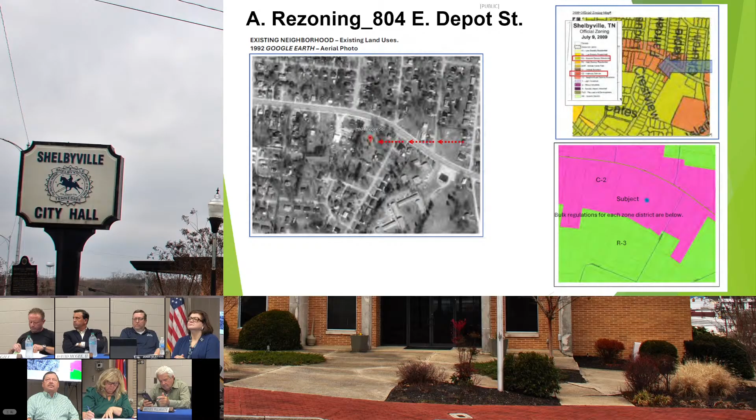It met all the, it's very consistent with the map, with our future land use plan and comprehensive plan. As you can see in this old photograph, it's always been a vacant parcel. Here's the 2009 edition that shows that same split zoning.

Surrounding neighborhood, this property here is also split zone, but this is a commercial land use. You've got some residential around there, but the commercial fits neatly within there. It cleans up that split zoning. And the owner has already started to provide screening around it by adding a tall fence around the residential area.

But in essence, it meets all of our, I guess it's a good project to clean up, I should say. Okay. Comments, questions?

Motion. I'll make a motion to send a favorable recommendation to city council. That's a good cleanup that's needed.

Motion made, seconded, roll call. Commissioner Gill, yes. Commissioner Gonzalez, yes. Chairman Landers, yes. Commissioner McGee, yes. Commissioner Moore, yes. Councilmember Blevins, yes. Commissioner Wilhoit.

All right, B, rezoning 103 Moreland Street, tax map 690, group D, parcel 4.

John K. Asher Branner, owner, C&L Properties and Investments, representing or requesting a favorable recommendation of the Planning Commission to the City Council for the rezoning of approximately 0.92 acres of the parcel currently zoned R2, medium density, low density residential, to R4, high density residential, for the purpose of developing a high density residential dwelling land use located in the Robinson Farm subdivision. Parcel is currently a single family land use and classified in the future land use map as North Main Street corridor character area.

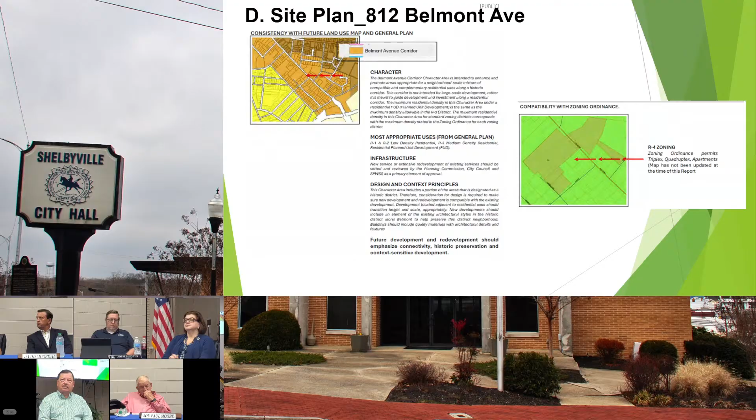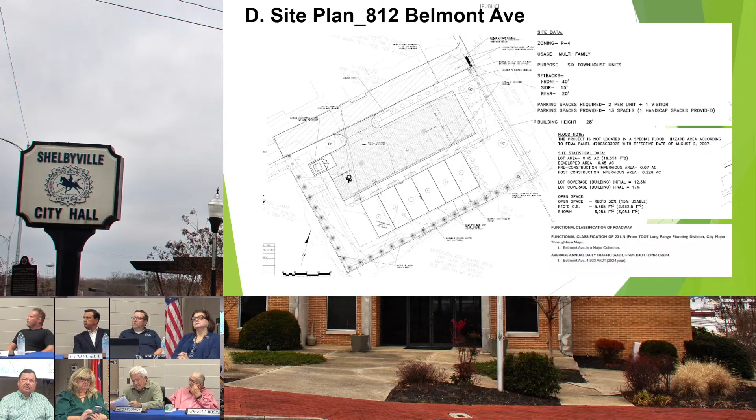Compatibility, this one's not showing it, but this is R4. You have the R4, the 1985 higher density residential here, and then you have the one across the street, and then just located to the southwest there. As far as all the standards, you can see this is the site, what they're providing, and they're either meeting or exceeding the requirements for multifamily use. Let's see, so you have 6 units along here. Here's Belmont, and then they're utilizing access in here. There were requirements for extending infrastructure, which they have done. They've recorded easements for that, as you can see in this photograph. So they've got easements running southwest.

This was their open space plan, and for my calculation, I just measured the area and came up with it, but this was just a conservative 21%. You can see that they've got all their landscaping surrounding the building and the parking lot, which is consistent with the design standard. And in the materials, textures, and colors, it'll be this section of multi-residential development. This is our updated standards from earlier this year. So you can see that for multifamily residential, consideration should be to maybe change the overall look to make it more distinctive. But I will say that our design standards are forcing a lot better quality multifamily. And so each one is kind of a test case, a guinea pig, so to speak.

Tom, I have a question. As you mentioned, in December I think we went over this. So when this came back to the agenda, I looked back at the minutes, and there was a comment in there about the 3. Yeah, about the 3, and it says that the lot will only support 3 units without improvements and 4 units with improvements to the sewer. I think that's what we were talking about. Yes. Can you address that comment on what's changed between then and now?

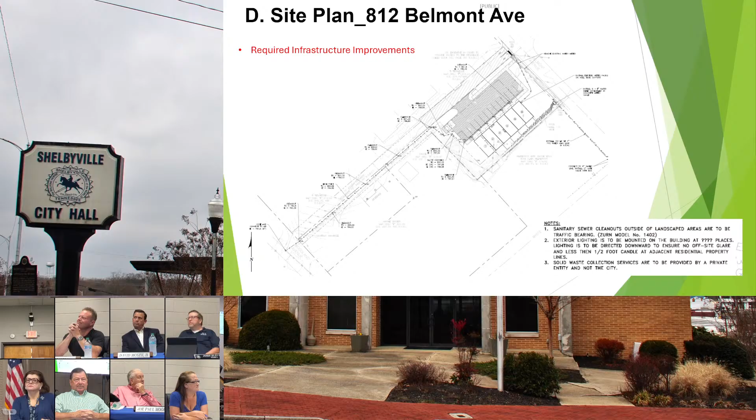There was no way that I would bring anything here and lie to anybody. It's not ethical. On the 6 units, we went from duplexes to 2-story instead of single-story. That allowed us to put additional units on there and meet the guidelines. So that's the reason we went from 4 to 6, because we went to 2-story units. The issue with the sewer was John Freeman said, I can allow you to put 4 units on there with the existing sewer.

That wouldn't have worked even if we would have left it at 4 units because it was a 3-inch sewer line. Once we got over there, tore the building down, got to looking at how things run and routed, it just wouldn't work. It wouldn't even work the way it was run. It came down the Marsh property and went down White Street. There was some creative plumbing going on there. At the least. And that's what we understood from the get-go. And that makes more sense.

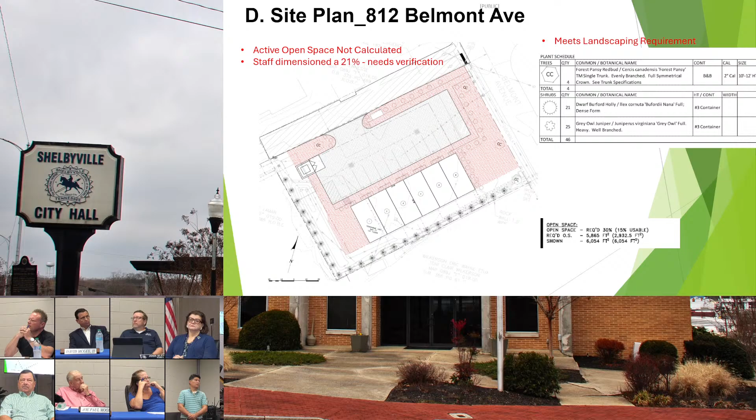Were there any more questions? The road there, the existing gravel driveway that went back, is that? That deed goes back to the early 1900s, and I've got a copy of it out in the truck. I guess that'll be the access, and then it'll pull into the parking lot there, so there will be no direct access off Belmont.

Yeah, and it would be difficult to do that because that's a major collector, I believe. Yeah. Along there, that's TDOT's right of way. You've got an existing one. They would most likely require that; that was one of the staff comments as well, working with them. Yeah. Getting that access set.

Yes. The part that's hashed out, you said gravel, we're doing concrete. Yeah, that was one of the requirements from TDOT Tennessee. Okay. They wanted that 20 by 175 concrete area. So it'll be concrete then leading to a paved parking area, or other concrete? Yes. Asphalt. Okay.

I think we took a large eyesore in the community and we'll end up with a really good product there that's going to look nice, nicer than most anything around it. Not that this affects this property, but in our PUD, which we would like to bring over to these higher densities as well, you can use a stormwater facility if it's a bioretention area. And then that can be part of the active open space.

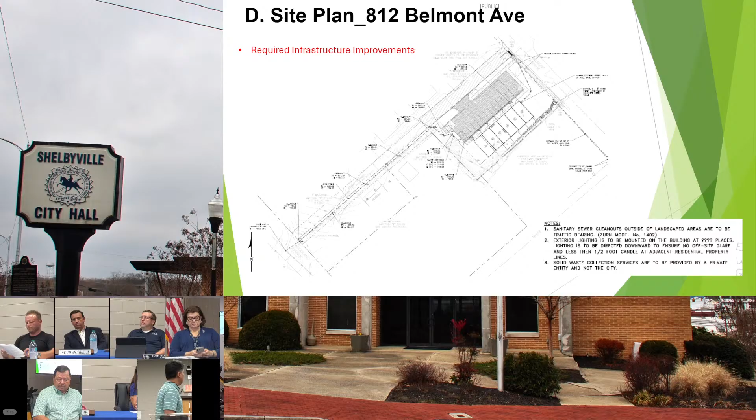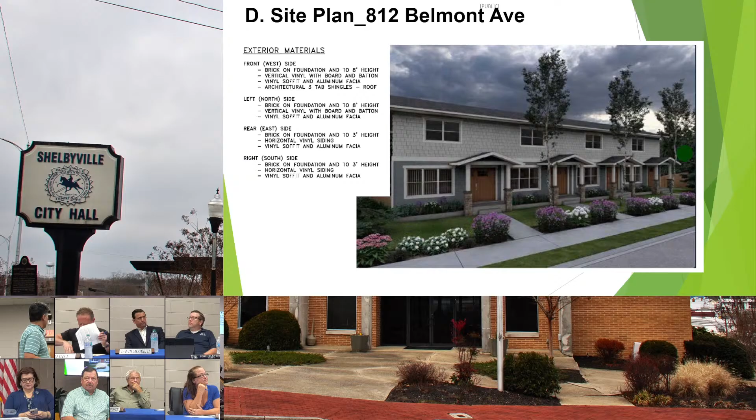Is this what they're planning? Is this the elevation that they're planning? This is what they're planning, yes, this one's accurate to their drawings. Go over the conditions, if there are any. Back up. The three conditions in the chart. Yeah. That's it.

Then, as far as the architectural part of it, you may want to add distinction to the unit facade, but the reason why I put it as desired is because I recognize that our design standards, I think of it as a step process and step improvements. So as we see each type of development come about, we might want to improve it more. Okay, yeah, I think the distinction would...

All right. I'll entertain a motion. Make a motion. Well, I was about to make a recommendation, but I guess I'll make a motion to pass the site plan. Motion made to approve. Do I have a second? Yes. I do have a second. Roll call.

Chairman Landers, yes. Commissioner McGee, no. Commissioner Moore, yes. Councilmember Blevins, no. Commissioner Wilhoit, yes. Commissioner Gill, yes. Commissioner Gonzalez, yes. You have 5 yeses and 2 noes, so it passes. All right.

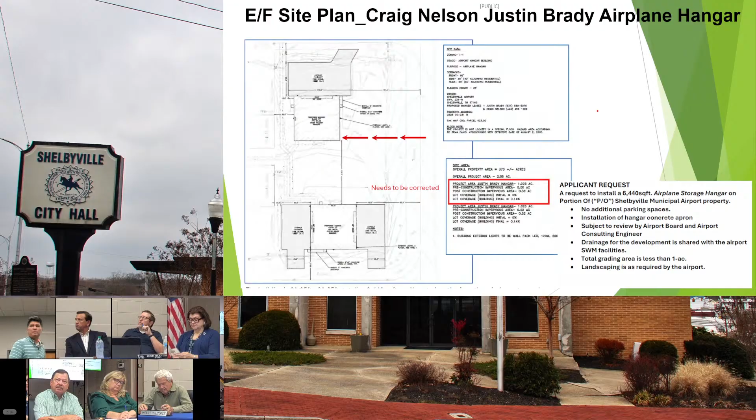This is the typical, it's just a metal building. I looked it up to see what that might actually look like. But in essence, both of them are giant parking lots for airplanes. All right, any other questions?

Make a motion to approve? I'll second. Motion made, seconded, roll call. Commissioner Wilhoit, yes. Commissioner Deal, yes. Commissioner Gonzalez, yes. Chairman Landers, yes. Commissioner McGee, yes. Commissioner Moore, yes. Councilmember Blevins, yes. Thank you.

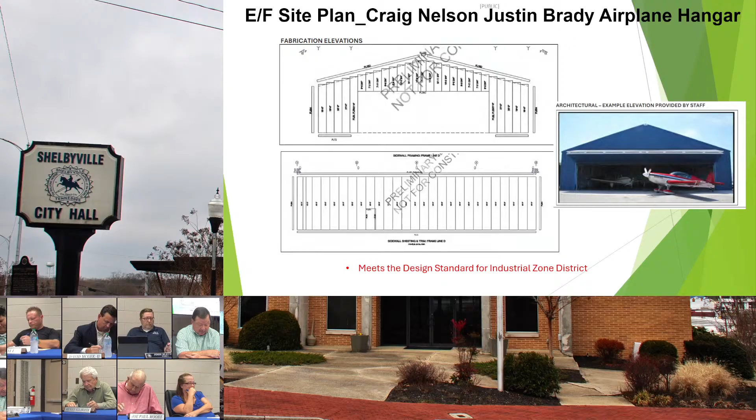Approved. All right, site plan for an aircraft storage hangar, Shelbyville Municipal Airport, tax map 50, parcel 23. St. John Engineering representing the leasee, Justin Brady, Paul Perry, owner representative, director of the Shelbyville Municipal Airport, requesting approval of the planning commission for a new 6,440 square foot aircraft storage hangar on a portion of an approximately 374 acre parcel, zoned I-1 light industrial and located on Shelbyville Municipal Airport. The airport is classified on the future land use map as North Gateway Corridor character area.

You got it on there twice. I didn't know. Oh, two of them. Yes, because they were separate applications, but they are the same thing. Same building there. Yeah, yes. Unless you really want me to talk some more, I can go through it. That's the same deal. Make a motion to approve?

I'll second. Motion made, seconded, roll call. Councilmember Blevins, yes. Commissioner Wilhoit, yes. Commissioner Deal, yes. Commissioner Gonzalez, yes. Chairman Landers, yes. Commissioner McGee, yes.

Commissioner Moore, yes. All right, site plan amendment for the Cooper Christian Academy, 1012 Madison Street, tax map 89F, Group G, parcel 17. Cooper Christian Academy owner and St. John Engineering representing, requesting approval from the planning commission amending the previously approved site plan by phasing development into two phases. Parcel is 11.42 acres, currently zoned C2 general business, part of the Chancellor Square subdivision, and classified in the future land use map as a mixed density residential character area.

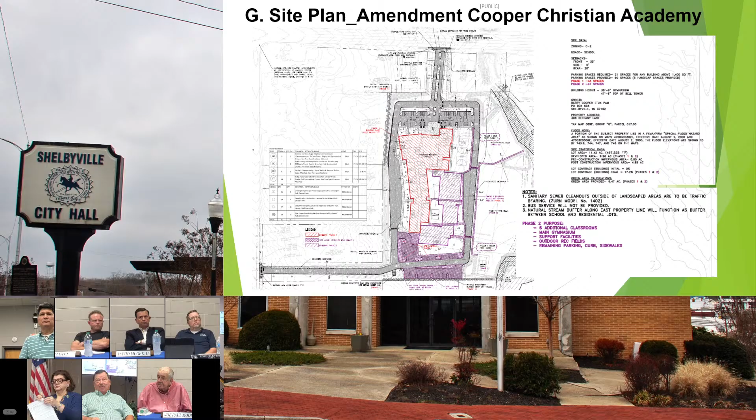So he's wanting to gradually do this, and from what I understood from him, it was actually his intention when it came before us the first time for it to come in two phases. That's the miscommunication between him and St. John. He didn't mention that, and he was actually surprised when it was approved as one whole thing. He said, well, that's supposed to be two units. So I knew this was coming. He just wanted to clean it up. Yes, and just information, Thomas did the same thing. They started off with the lower grades, and then each year, as the kids got older, added on.

The vesting of site plan applications, the state has changed it to 3 years. Ours is a little bit less, but it depends because you can also request for approval. So at some point we'll amend our

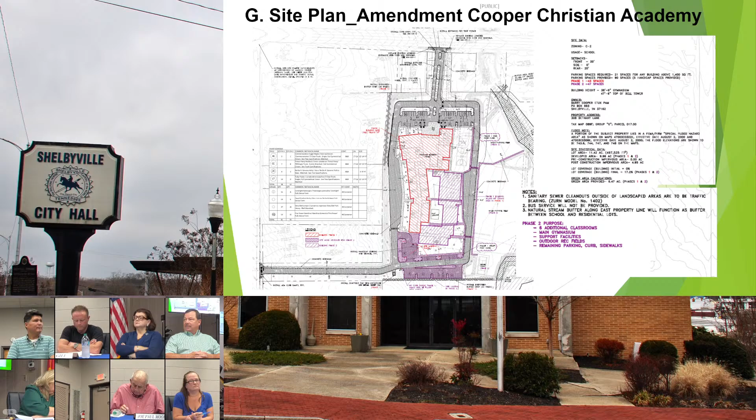zoning ordinance. Are there any offsite improvements at Bethany or Madison because of the school, or is everything stopped right at the edge of the road? As far as road improvements or anything because of the traffic study?

There's no changes. And they had sidewalks out there, right? Like they were building sidewalks from Bethany into the school. Yes, there's sidewalk on one side. I kind of remember that. That's all part of it because they were trying to phase that out on the first one, and we made this. Well, they tried to take it out in phase two.

Okay, I'll entertain a motion. Motion to approve the site plan amendment. I'll second it. Motion made, seconded, roll call.

Commissioner Moore, yes. Councilmember Blevins, yes. Commissioner Hill, yes. Commissioner Gonzalez, yes. Chairman Landers, yes. Commissioner McGee, yes. Commissioner LaVoy, yes.

Site plan amendment for Bedford County Juvenile Justice Center, Arch Chapel Road on North Creek Drive, tax map 50, parcel 38.10. Bedford County owner, Huddleston-Steele requesting approval from the planning commission, amending a previously approved site plan by amending the original building design and adding warehouse storage. The 32.5 acre parcel is currently zoned C2 general business and classified as a North Gateway corridor character area in the comprehensive plan.

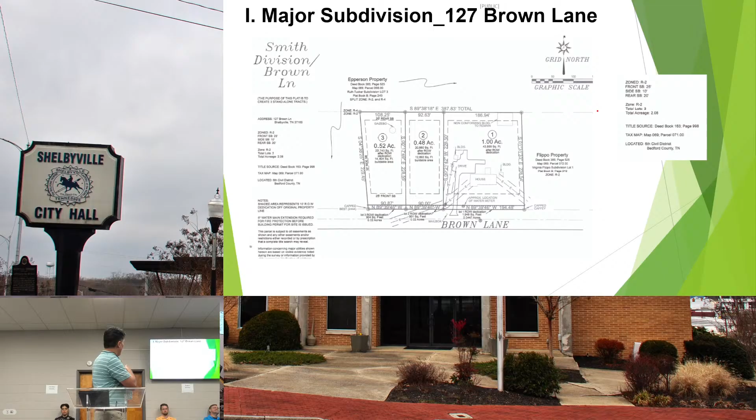And here is the original, go back to, that's where the house is. These are the 2 lots being created, and staff is requesting that this item be deferred for 30 days to allow the owners to obtain pricing for extension of that fire protection line.

Okay, any other questions or discussion? Guess we'll rehear it again. Motion made and seconded, roll call. Defer for 30 days, 30 days per owner's request.

That should be staff, actually is that staff? Yeah, this is something we've approached the applicant, Northcutt, about, that would be the best pathway. Now they might decide to withdraw the application altogether, depending on what the cost is for that extension, because there's a lot of rock in that area.

Okay, clearing that up. So the motion, you got a motion to defer for 30 days, is that right? Yes, yes, we need a motion. Okay, motion made and seconded, roll call.

Chairman Landers, yes. Commissioner McGee, yes. Commissioner Moore, yes. Councilmember Blevins, yes. Commissioner Wilhoit, yes. Commissioner Gill, yes. Commissioner Gonzalez, yes. All right, since we moved Jay into administrative approvals pending, we'll let you take those away.

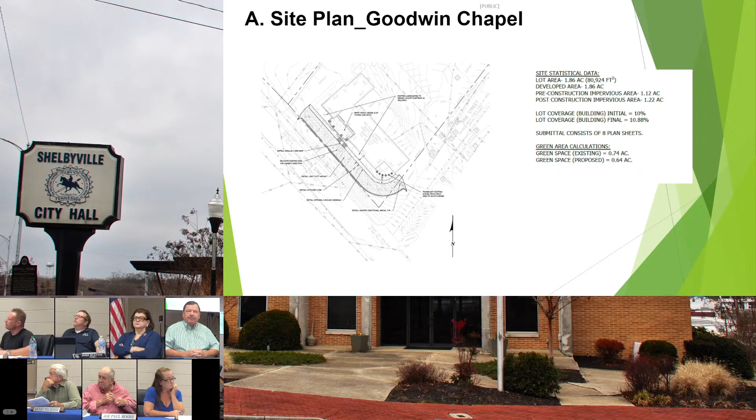Okay, so under administrative approvals, first item is 850 Union Street. There was a drive that they're wanting to actually add, the front section of it, and then there was a small addition. So this is the drive aisle. This is private, it's connecting a parking lot. This item is the addition.

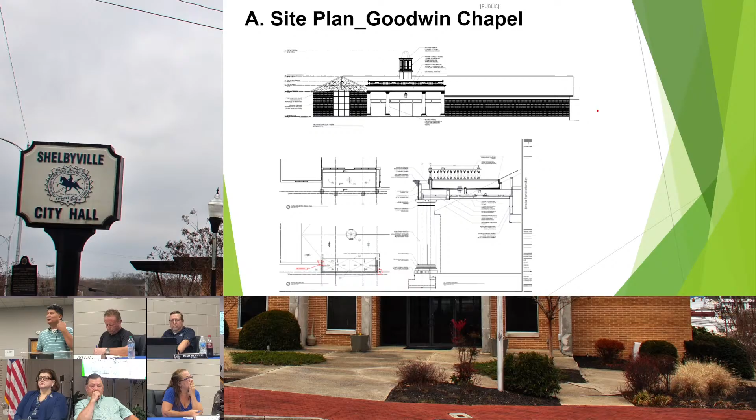And so that was under the 5,000 square foot. Usually, actually I do 2,000 square feet, but since this was just a flat surface and then a smaller feature, this was administrative approval.

Do you want me to just continue on? Yeah, thank you. Okay, we have a couple of construction plans, Stonewall Run, which is just off of Green Lane, Green Court. They're under review with Willow on that.

And then the Entertainment District. I don't know if you want to speak about it or you want me to speak about it. I thought you were doing that in October. Am I wrong? I did say October, I put it on the agenda, but I could leave it off until we have a little bit more information.

But I guess, to front it, what we're working on is this area that you see fronting on Grindstone, Cowboys here, Glass Hollow, this area that reaches out to the back. This is Spring Street, and that's also the Riverview District, or proposed Riverview District. We're working on potentially, I don't know if it's going to be an overlay, I don't know if it's necessary to be an overlay right now, but we're working on an Entertainment District to allow this to be pedestrian access only, converting it over from vehicle to pedestrian, and then allowing for tables and chairs along there so people can eat at whatever restaurant they'd like.